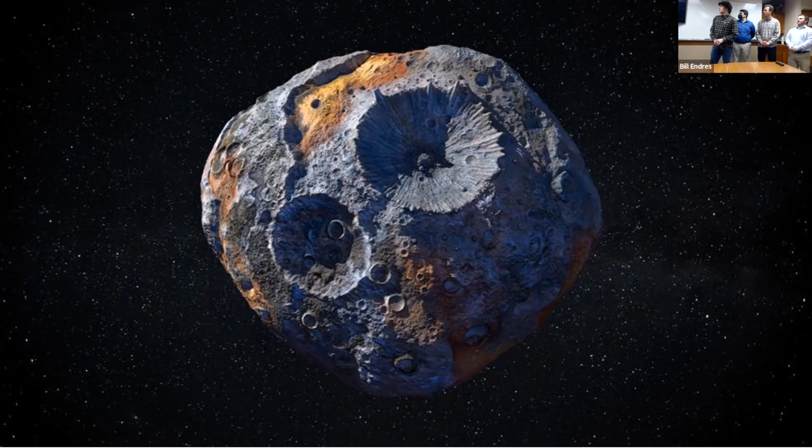Locked in orbit around the sun between Mars and Jupiter lies 16 Psyche. Psyche is believed to be the remnants of a once developing planet. Early in the planet's development, Psyche was violently disrupted, hurtling its exposed core through space. In August of 2022, NASA will launch an orbital craft to study Psyche from afar. If this data comes back promising, a surface mission will be considered.

With 1/70th of Earth's gravity, Psyche is considered a microgravity body. This introduces unique engineering challenges. Previous microgravity landers have struggled, and this struggle could lead to mission failure. This opens the door for new, novel ideas.

Next slide. We are Team 1, Landing System for Uncertain Terrain. I'm Austin Nardi. With me today is Dutch Schaefer, Cameron Curtis, Chris Pryor, Tyler Harris. Our advisor is Dr. Allen, and here is a brief overview of our solution.

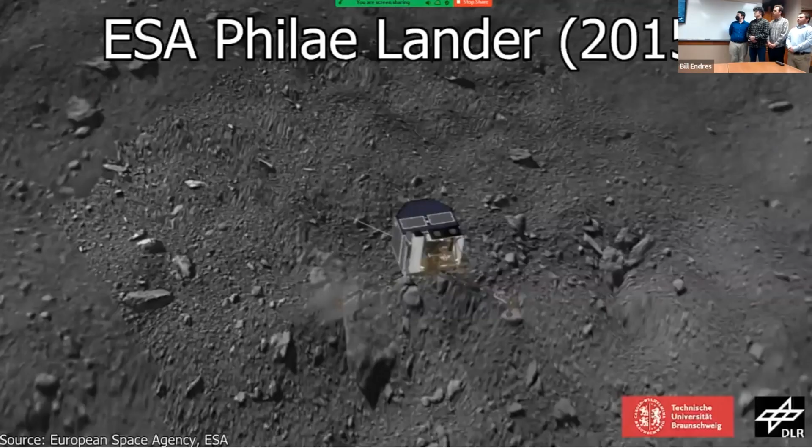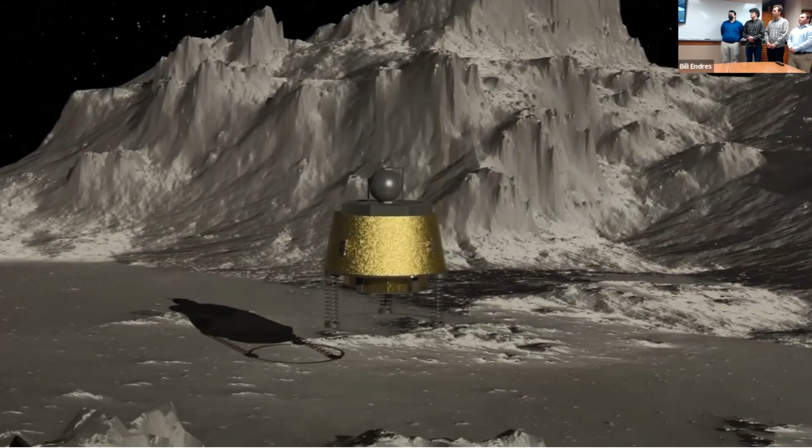The Kinetic Energy Rebound System, a prototype rebounding landing system designed by our team at Michigan Technological University. In previous microgravity landings, the anchoring system has been a common point of failure, leading to undesirable rebounds that may jeopardize mission success. To address this, our team has decided to take a radically different approach and create a system that utilizes rebounding to its advantage, requiring no anchoring at all.

Our design uses collision dynamics and energy transfer to create a controlled rebound scenario. By absorbing the potential energy of freefall into compression springs, there is a moment in time where the velocity of the payload is essentially zero. We release the package at this moment, leaving it safely on the surface while the rest of the lander springs away.

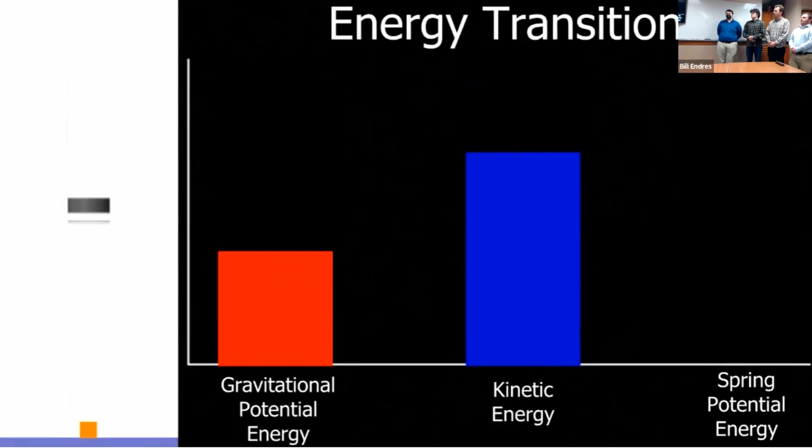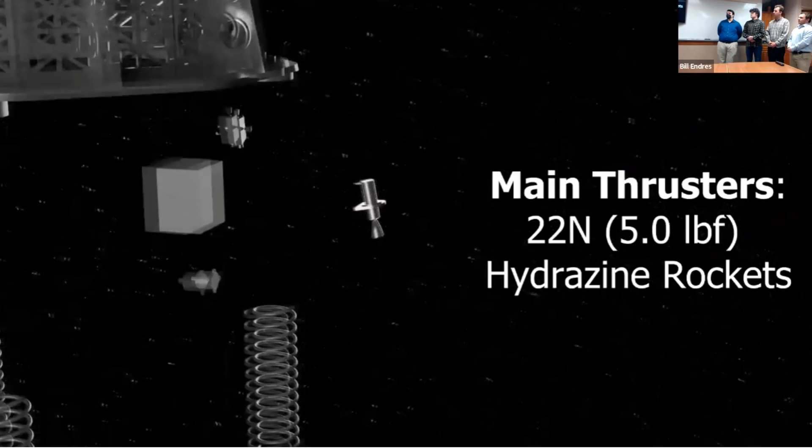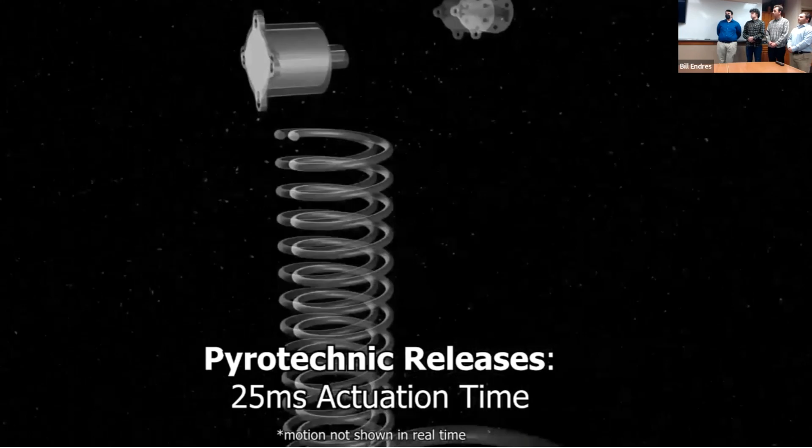Removing the external MLI coating reveals some of our key design features, such as the main thrusters, used for powered descent from orbit, the attitude adjustment thrusters, used to orient the craft normal to Psyche's surface, the pyrotechnic release pins, which allow for pinpoint accuracy in payload deployment, and our compression springs, which are the focal point of this rebounding design.

All right, with that, I'd like to give a brief overview of what we'll be discussing today. So our mission begins: we were commissioned by NASA and ASU to develop a system to deliver a scientific research payload to the surface of the microgravity planetesimal known as Psyche. We have been divided into 4 teams at Michigan Tech who are looking to develop a full system deliverable for sampling the surface. We are the landing team. We are also working with the robotic explorer team, the sampling system team, and the sample return team.

Our mission is split into 2 distinct phases. We begin with a powered descent from the orbiter to a point just above the surface of Psyche, and then our solution takes over in order to safely deliver the package to the surface. To prove the feasibility of this concept, we have developed both physical and simulated prototypes in order to showcase the functionality of our design concept.

Some of our engineering requirements that we have developed for this project. Initially, we set out to have our target mass right around 450 kilograms. However, due to the fact that we are working amongst 3 other teams whose masses are also fluidly changing, we have exceeded this, but this is not beyond the realm of our system to adapt to. Additionally, we initially set out to have 75% of our total volume be available for payload. However, this is a very scalable value, and we currently have about 80% of the internal volume being usable.

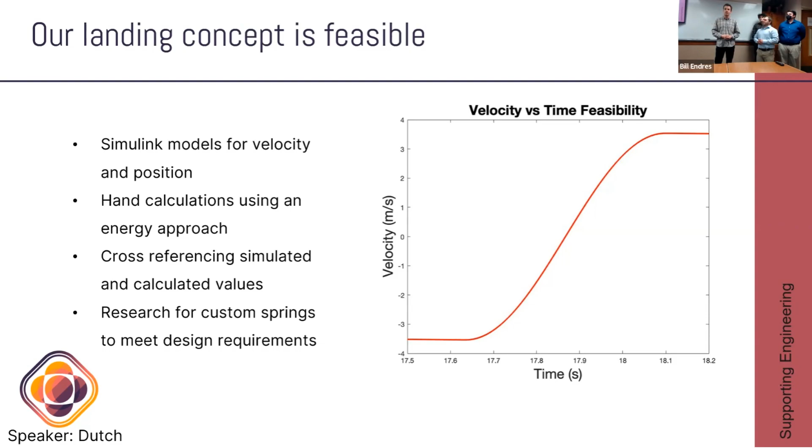So using those simulations, we were also devising things like the spring constant that we would need, which is obviously a focal point of the design that we have here. So we went in and edited masses and things like that and came up with spring constants that we used to order the springs for the prototype.

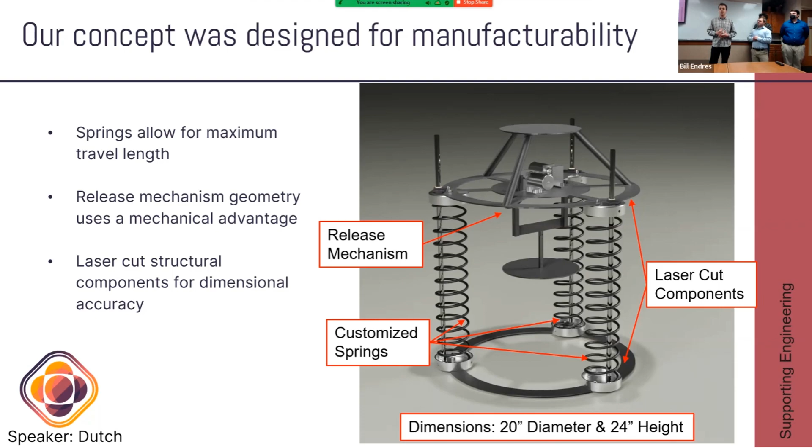We also devised a release mechanism that used mechanical advantage so that the solenoids that we had purchased would be able to do their job effectively. And then we also used laser cut structural sheet components to ensure that our center of gravity requirements were being met, as well as our mass requirements.

So as our system sends the voltage, as you can see in the schematic on your left, we have the BeagleBone. The GPIO pin is the pin that sends out the voltage. It goes to a relay, which controls a 12-volt source power. Then we have our 2 solenoids tied in parallel so that they have the correct timing.

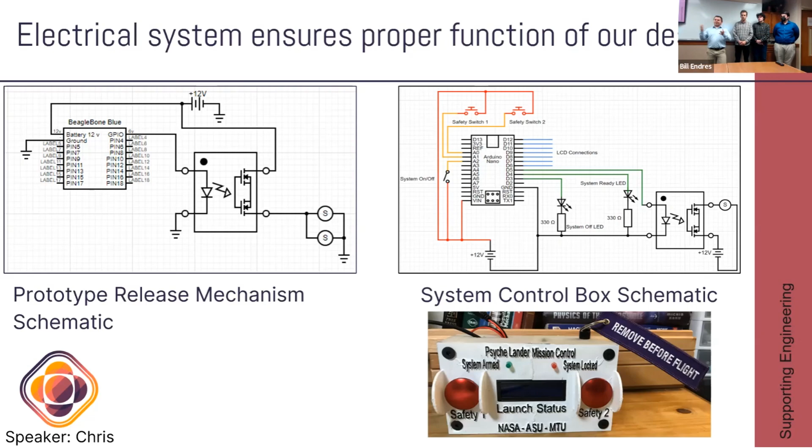On the right here, we have just a simple schematic of our release box, our control system box. And this really was just a point so that we had a little bit of safety measure so we weren't dropping the box unintended from our height.

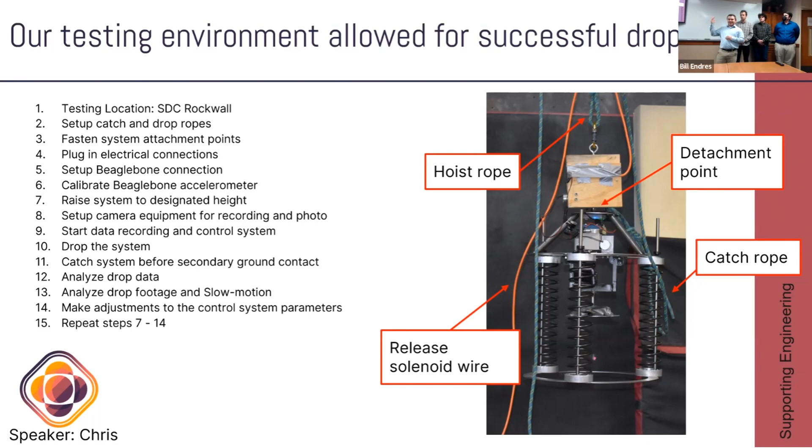So our testing environment was up at the SDC. We would arrive and we would calibrate our BeagleBone to the gravity. And then we would lift it up to the designated height for the day and we would drop it. As it came down and collapsed its springs, released the payload, we would then take the data from that, analyze it alongside slow motion video, and kind of customize our control system timing. We would then lift it back up and drop it again.

So we have some data from our tests. Round 1 proved that we had a little bit of a structural issue, which we correctly fixed. Round 2, we were able to pull out usable data, and we dropped from 1.5 meters with 3.36 kilograms and an expected payload force of 6 Gs.

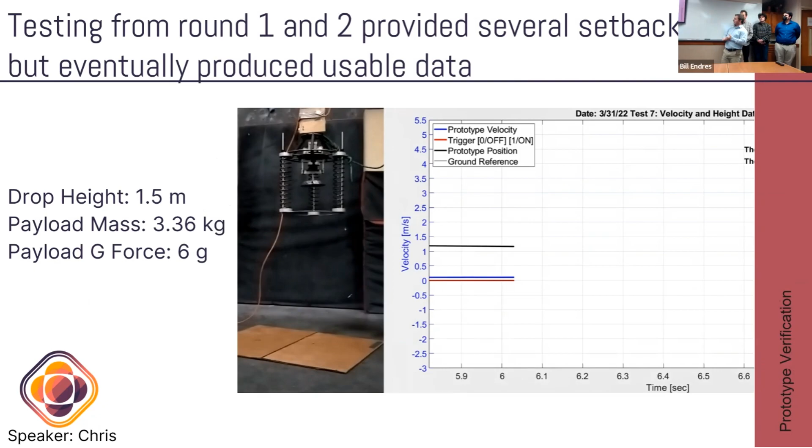If you play the video here, we can see it'll come down in slow-mo. And as it's coming down, our velocity goes up. We see the spike and we have a trigger. If you can tell, the payload was released just a little bit late. So while this was very promising, we needed further improvements.

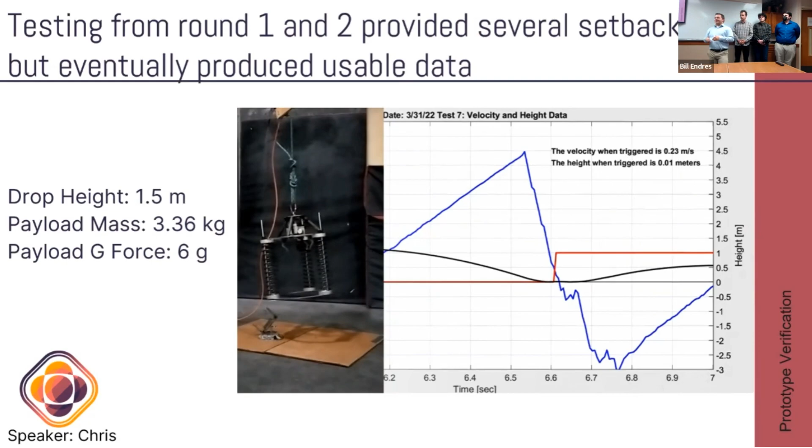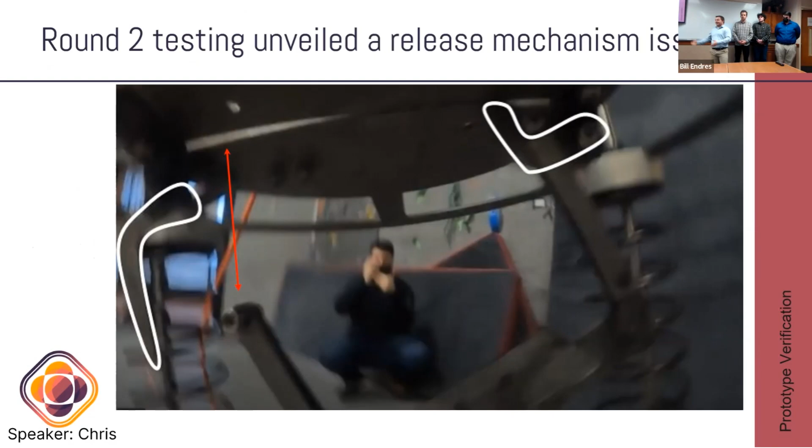After observing a lot of our slow motion video, we noticed that we had a mechanical release issue. On the far left of your screen is a latch that was fully unlatched while the right side was fully engaged still. This was causing our timing to be off and throwing our payload to one side.

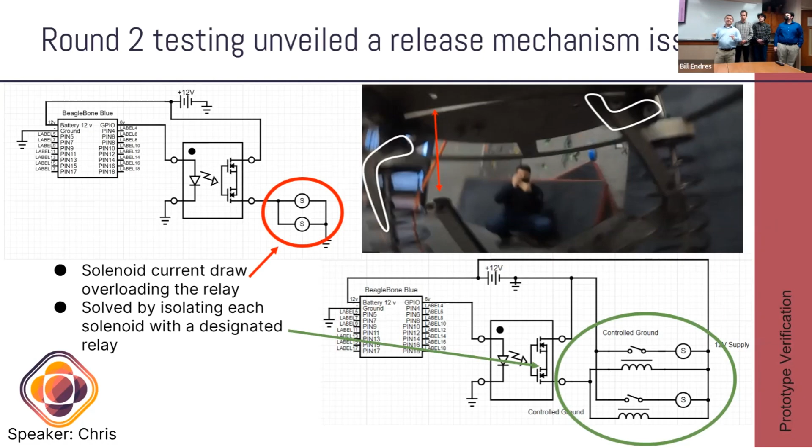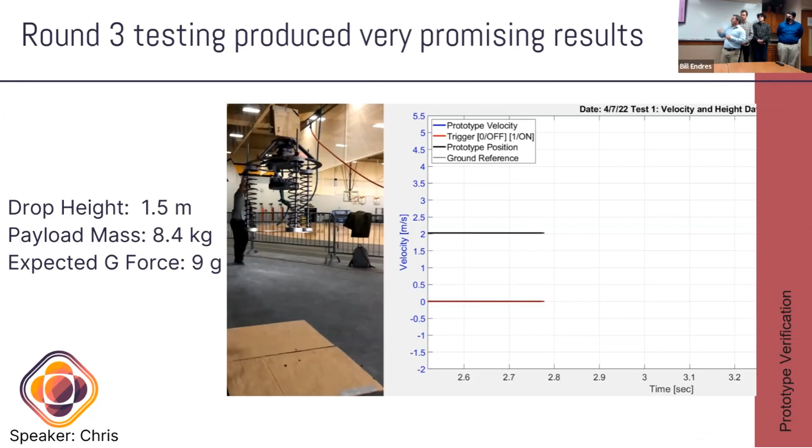Then we moved on to round 3 testing. This is again from 1.5 meters, but now we have increased our payload mass to 8.4 kilograms and an expected G-force of 9 Gs. As we come down, again, we see our velocity go up, we impact and we release, but again, it's just still too slow. So the red line here is our trigger, and we were triggering based off of velocity, but we were just still off. But this gave us a lot of confidence.

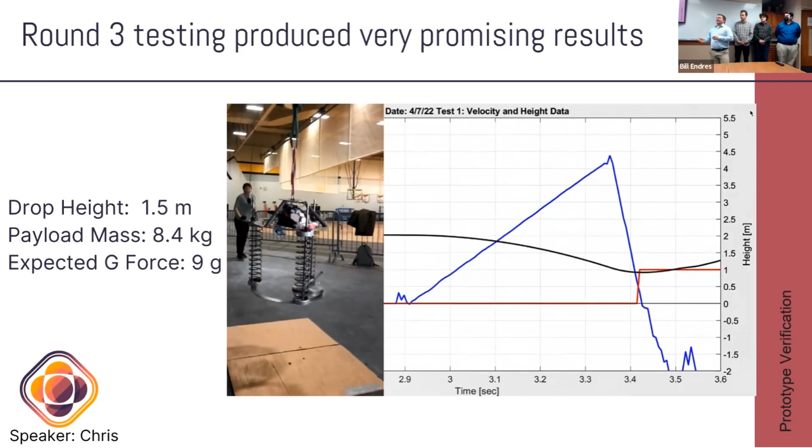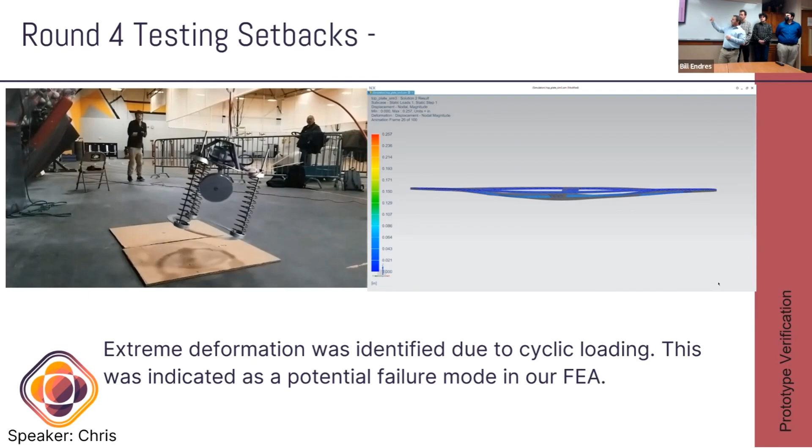So we decided to drop from our full 1/5 scale. And this is where we came into finding out we had some deformation issues. As this video plays, you can see the top of the plate deforming in. We kind of anticipated this through our FEA. If you play that video, oh, sorry. So through the FEA, and as that plate deformed, we were seeing about 1/4 inch of deformation. So we believe that this plastic deformation we were seeing was due to cyclic loading. But we got some very great results.

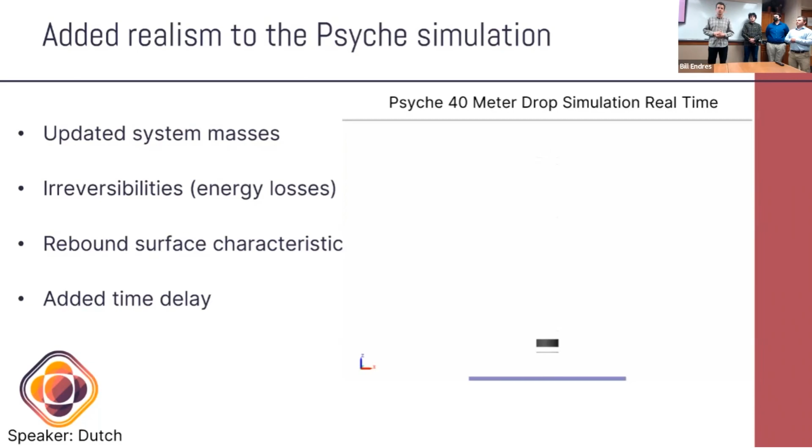All right, through this testing and simulation process, we did identify 3 major components to improve if we were to move from the alpha phase to the beta phase of prototyping. Mainly, the accelerometer that we use would need significant improvement to its sampling rate. The BeagleBone was limited to 166 hertz, which significantly limited our ability to capture that inflection point during our testing. We would recommend improving this to anywhere upwards of 2000 hertz with improved sensors.

Additionally, the delay caused by our mechanical release system caused some timing issues. We had to build in a pre-trigger to account for the fact that we couldn't actuate our release as fast as we would like. So minimizing this value would allow for further capturing of that instant in time. And then finally, we would like to minimize the material deformation experienced, both through improved materials as well as structural changes to the design of the prototype. We'd really like to minimize that value below a 1/4 inch of material deformation.

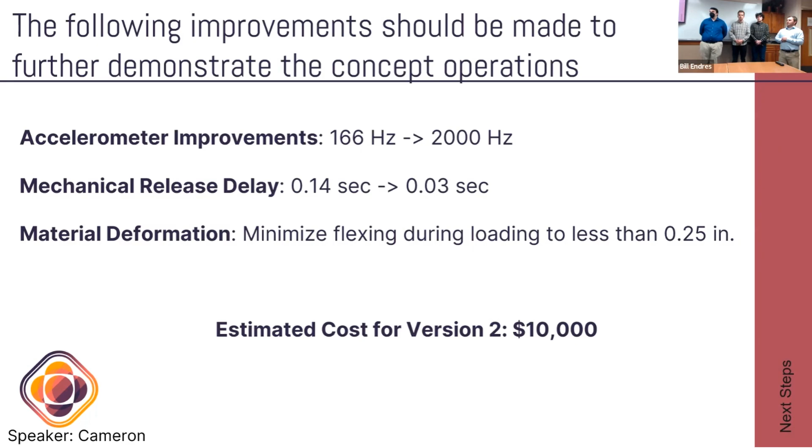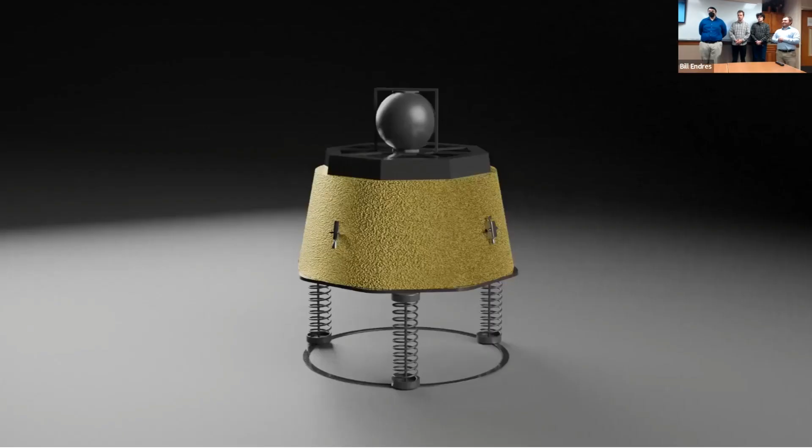So with that, we'd like to thank these individuals for their continued help through our process here in the program. We'd also like to thank all of you for your time and open up the floor to any questions. All right, thank you, team. Any questions?

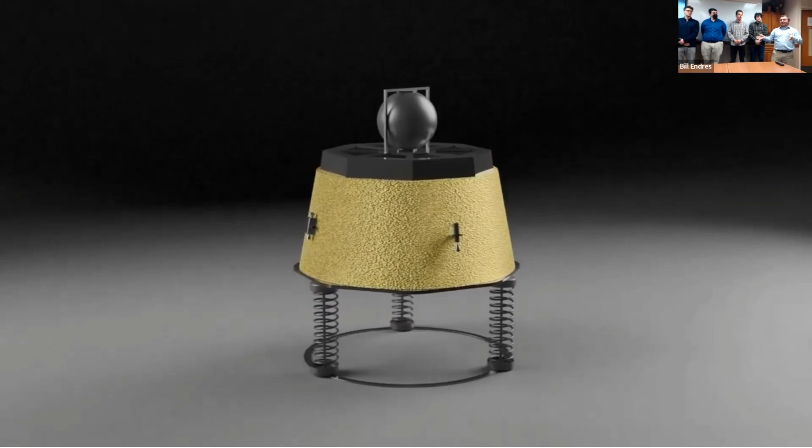What's driving this increased cost for the second prototype? You're more than doubling the cost. Yeah, mainly our control system. For our proposed version 2, we would like to use the cDAQ, and we know that the school provides some cDAQ and National Instruments software and hardware, but this was all brand new from NI's website, and that was about $4,000 of that cost. I don't know how much the school would allow for us to implement that, but that's if we were going to pay for everything straight off. That's just to achieve the sampling rate? Yes.

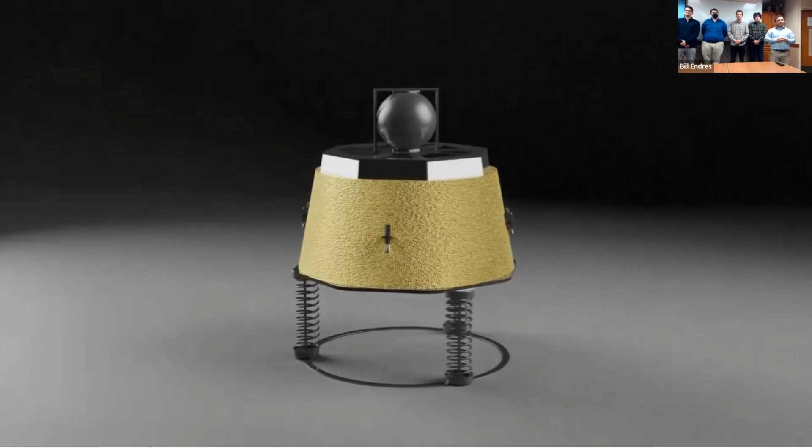What is MLI? Multi-layer insulation. So MLI generally has a gold foil on the exterior, like you see on most satellites. It has several components on the interior below the gold foil that help protect from both the radiation experienced in space as well as the extreme temperatures. And that would mostly be used to cover up any sensitive electronics or other components that may be sensitive to the temperature. Space wrap. Yes. Space aluminum foil, pretty much.

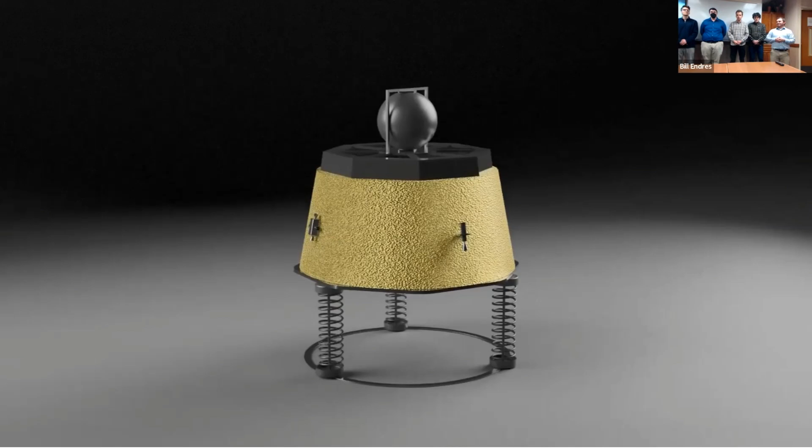Do y'all have any proposed ideas on how to mitigate that deformation? So if we had more time in our testing process, we were actually considering welding some steel ribs to the top plate to brace the flat sheet metal. That would help prevent some of that flexing that we experienced. Additionally, if we were to totally remake that component, probably using a thicker gauge of steel or higher strength. We were mostly using mild steel for the current prototype.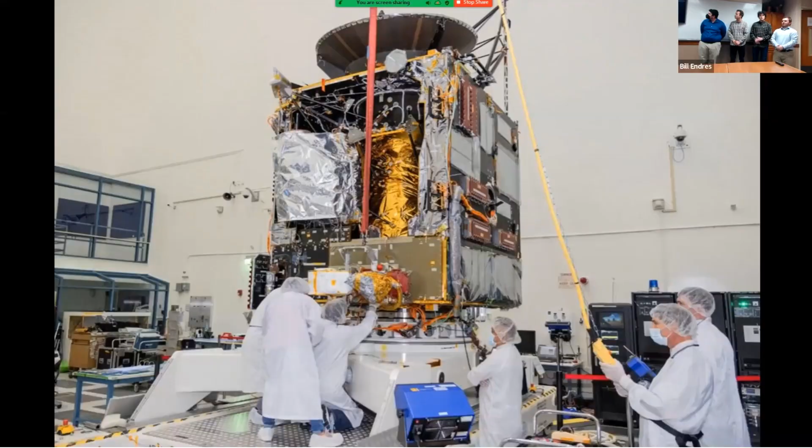You're looking for 0.03. You want to trigger in 0.03 seconds? Mechanically, yes. What's the story behind that number? So we have identified that there's a pretty standard release pin that is used in space applications nowadays. It uses a pyrotechnic charge, essentially a small explosive charge, to pull a pin in a split second. And the general rule of thumb that we found is they could actuate in about 25 milliseconds. So if we could simply use pulling those pins as our release system, that's about the delay we would be experiencing from when the control system says go to pins fully released.

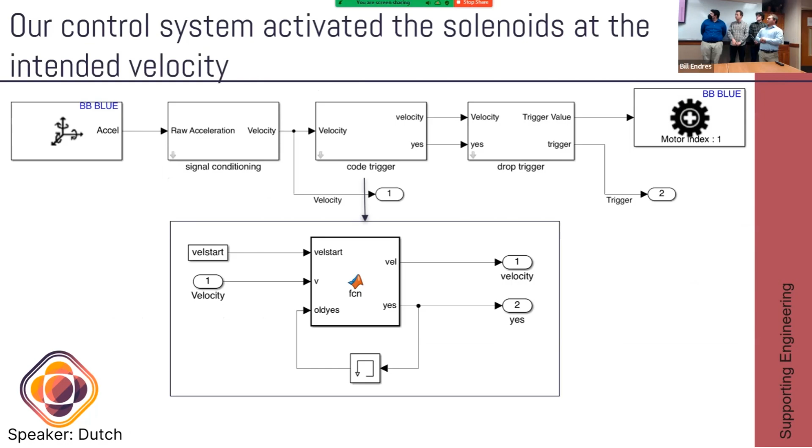Can I see the 2 overlaid, the simulation and the actual? Keep going. It's quite a ways. Go back. Oh, there you go. If you have any questions, let me know. Lots of information.

And then the wobbles, it's just flying through space? In our simulation, it was the base of our lander vibrating back and forth, causing those. Is that where you have your sensor? Is it on the base? No, in the simulation, the base vibrates, but that also causes small vibrations in the body. So it is sensing the body in the simulation. But the sensors are located up on the middle upper plate.

You suppose that lag there after the first drop in velocity is due to the rope? Yeah, so we were dropping, and when it would rebound, we'd catch it with the rope. So that is a lot of the reason why we saw the flat line after. Okay. But it is also due to our sampling hardware. We primarily used the rope just to keep the testing safe. Makes sense. Additionally, the BeagleBone, once it impacted, would measure fairly accurately up until our release, but once the rebound started, it would shift slightly in the housing, and all data from that point was kind of hit or miss. Okay.